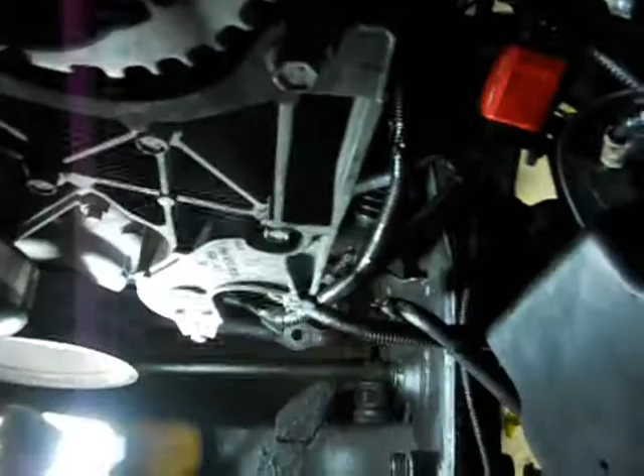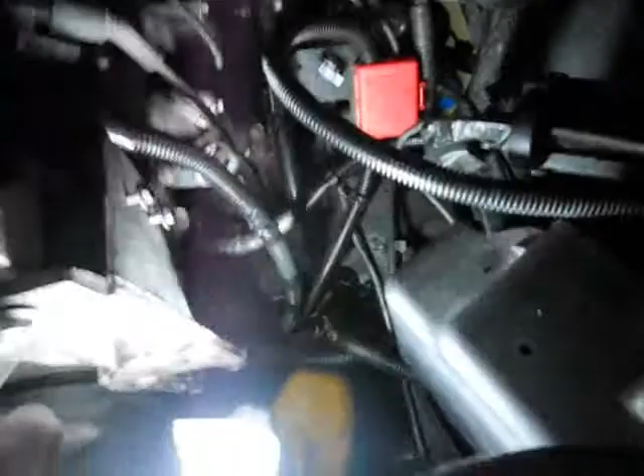Had a little bit of a problem. Got the box out, got the pump out, and the new pump's now messed up. There's a bolt, a little bracket that holds the pump on, that uses that block hole right there, going into the cast iron block, holding a bracket on the back of the pump. That bolt is different than the three bolts that hold the pump on. I accidentally put that bolt in the pump and messed up the pump.

So I got another pump, the old pump. Ouch, see what I mean? Tight places, not a good working environment. That's probably one of the reasons why I even screwed this up.

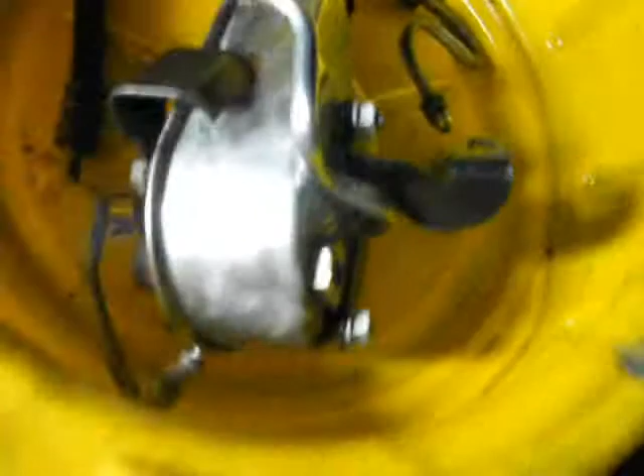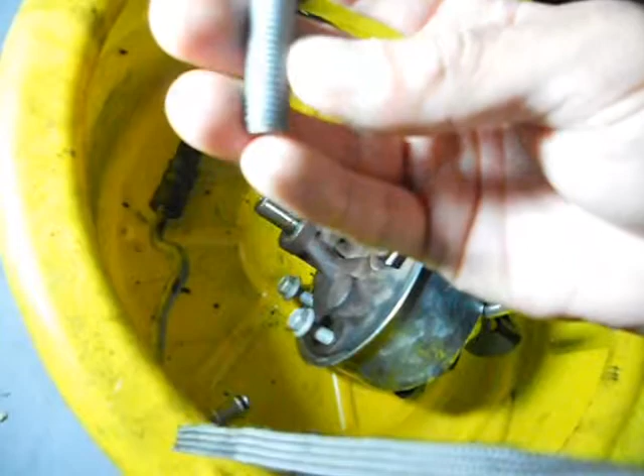The old pump fell and dented the bottom of it. No big deal. These are the pump bolts, you got three of them. That's your little bracket. The wiring harness runs down over there. Had to redo that wiring harness since the loom broke on it. This is a 15mm head, and the threads are 10mm by 1.5. So you got three of those that work fine.

Alright, you also have one of these bolts that looks pretty damn similar.

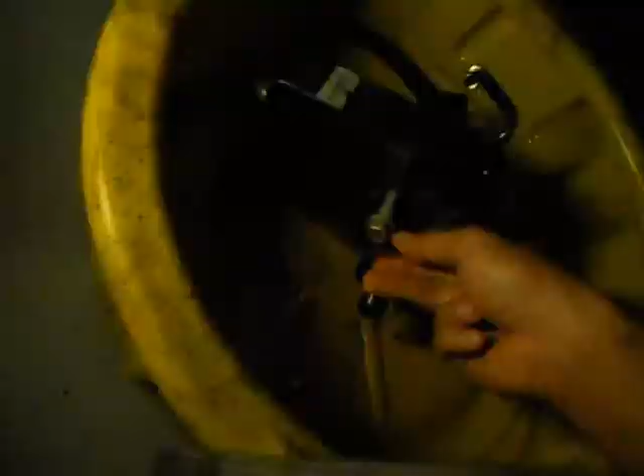Oh, there goes the light. Oh my god, man. I'm gonna have to get another battery. This is ridiculous working like that. Till this battery goes dead, back on. Anyway, what was I saying?

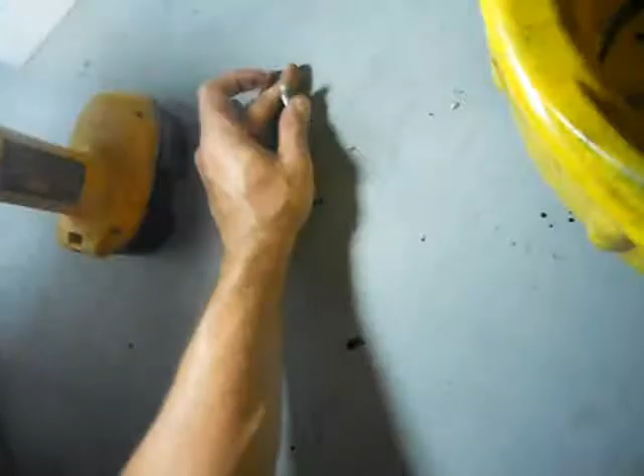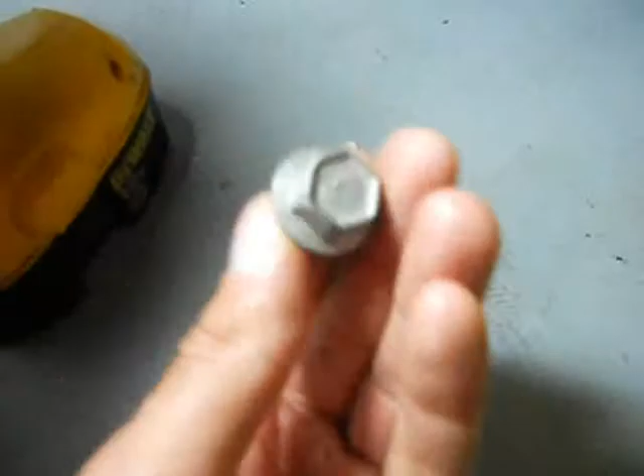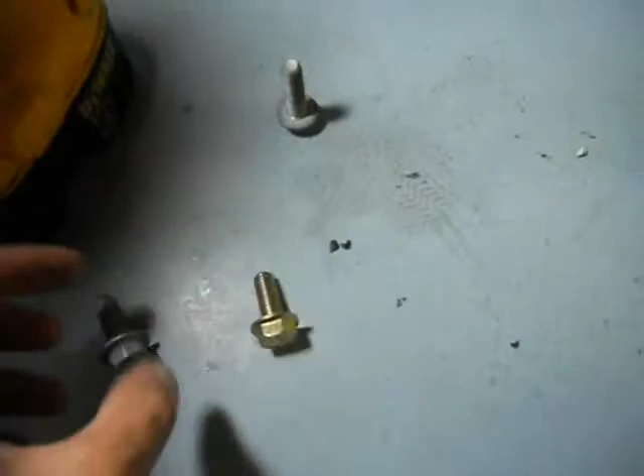This bolt looks real similar to these bolts, if I didn't already show this. This one's slightly smaller and has a domed head on it. I guess it kind of locks into the block, but I'm gonna need one of these bolts. For the time being, I got one of these from the hardware store. It looks nothing like it, I know, but it fits. It's higher grade, 10.9. It said 9.8, but it's just slightly shorter, and I'd rather go shorter than longer.

But if anyone has one of these bolts on these trucks, I'll buy it from you. If you got a Parts 5.3, 4.8, 6-liter truck engine, LS1, LS2, they all use this bolt in that bottom. I'm pretty sure they use that bolt hole and have a bolt in there, and that's where this bolt goes. Crazy looking bolt, goes right in there, whatever that hole is. So if you have one, let me know, I'll buy it from you. I'm probably gonna have to go to the dealer and pay $7 for it just to do it right, or I'll hold off and find one in the junkyard in 10 years.

Like I was saying, this loom over here, it's all the way up here. Cheap crap, they use the worst loom on these things now. It was falling apart already, so when I had the pump out, it really fell apart. So I put new stuff on. That's kind of old GM stuff down there, and this is some cheap stuff up top, but it'll work. Power steering fluid, like I said, when it gets on the frame, it totally eats it up, eats up this wax coating. It's the worst coating ever on this General Motors stuff.

Power steering fluid, transmission fluid, eats it right up. Motor oil will too, but it takes longer. So I spray bombed the hell out of it, undercoated it. It looks just awful going all the way up here, but it's pretty much sealed up. I got undercoating like everywhere.

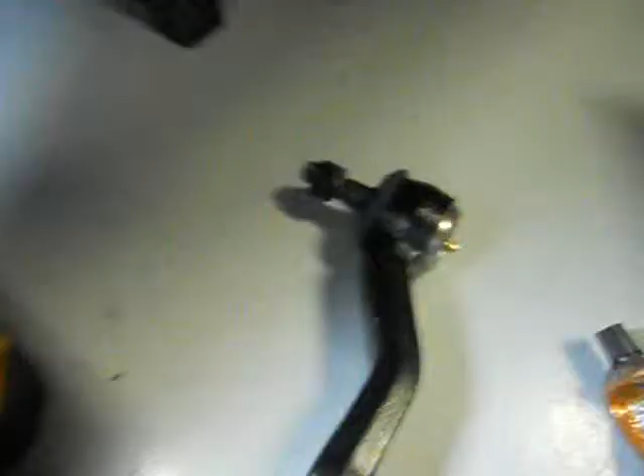New idler arm - not idler arm, pitman arm. I'm waiting on the idler arm. This thing looks so much smaller than the one that came off, so I'm not too pleased about that. AC Delco. Ripped my ball joint boot over there too, or it was ripped. RTV'd it, and actually it's holding, believe it or not. Pretty strange, it doesn't usually work.

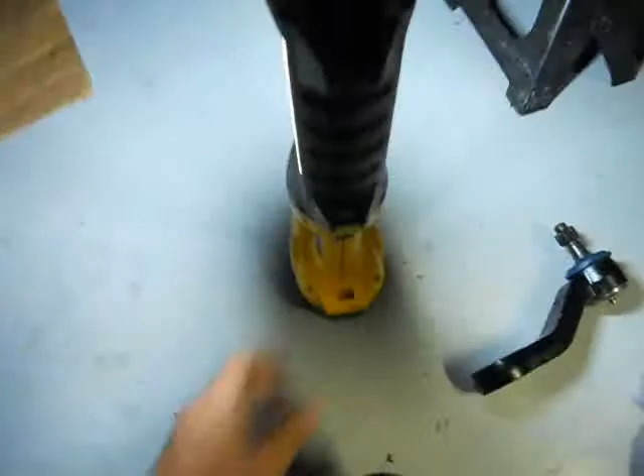I think I'm gonna use windshield urethane and put some in there because this stuff's hard as a rock. So I screwed that up, so now we're delayed some more, but we don't have a box anyway, so we can't do anything with it. That's the bracket right there.

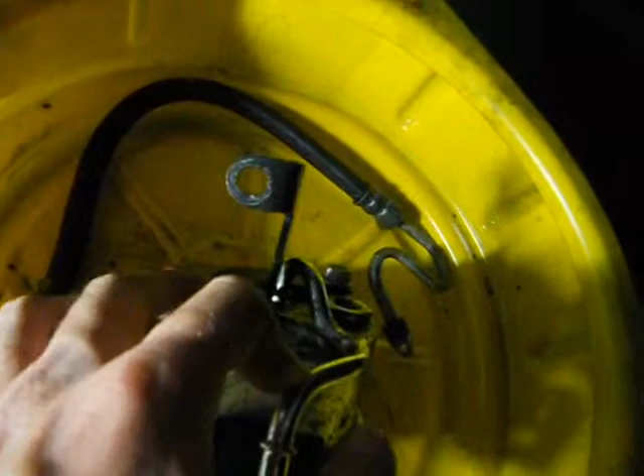When you take the pump out, you can actually leave that bracket on, and you can get these two nuts off afterwards. But in order to do that, you must disconnect the negative battery cable. You gotta disconnect the alternator, because that little wire comes off of this junction block, and unbolt this junction block - got two 10s over there. Just let it hang, and you got much more room to fish the pump out.

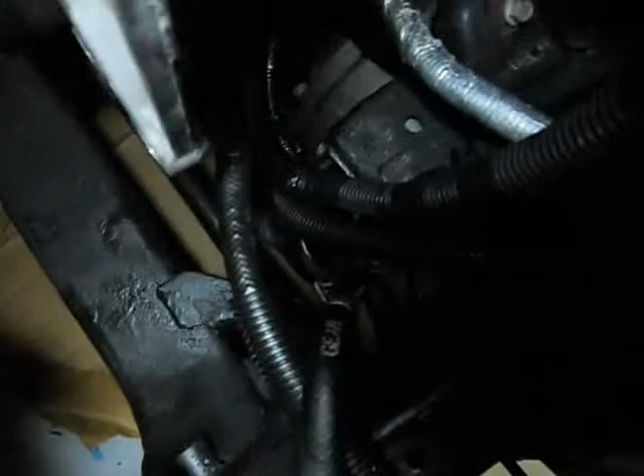It's gotta come out this way. Oh, you gotta remove your engine coolant temperature sensor connector right there too, and you can fish it out. It's pretty easy, it's just a clamped on connection right there, and your high pressure line - that's the other side, goes to the gear. It says gear return line. You got a cooler up front somewhere in there on these models. But that's all we can do.

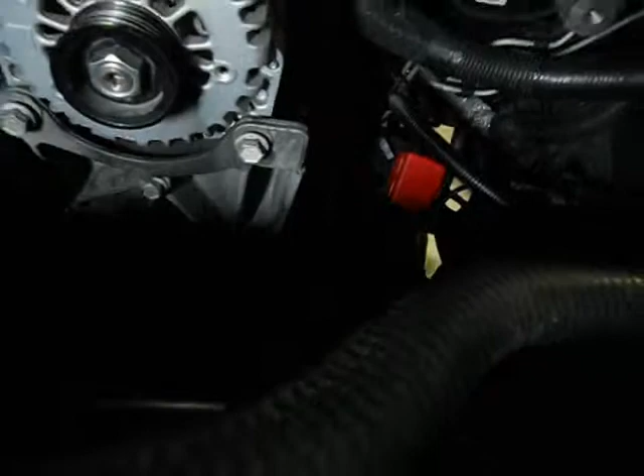Waiting on idler arm, we'll see what kind of disaster I can do with that next. And I need a bolt - if you have a bolt, let me know. That's the bolt I need.

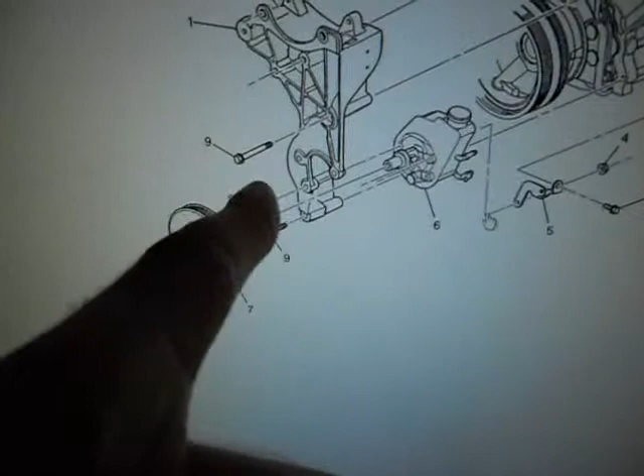Figured out the size, 10mm by 1.5, that's this bolt. That bolt. I think the bolts that thread into the heads might be different. These are M10 by 1.5 to these nuts that go in the back of the pump. So if you ever have a problem with those or lose one, that's what it is.

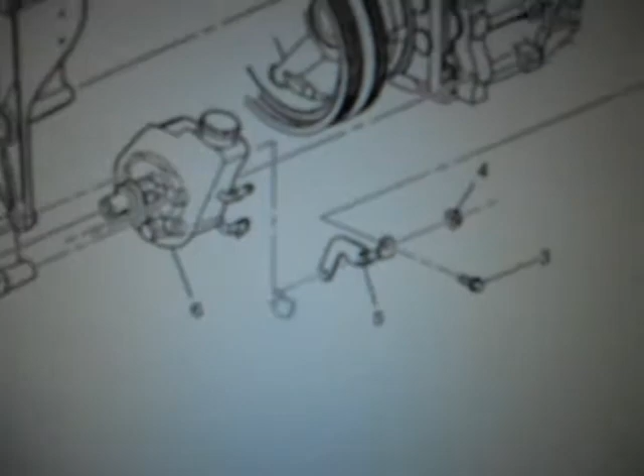So bad, we got Cookie, and we're figuring it out as we go. This damn, what is it, GM Parts Giant I think I'm on. They don't show you the part number, so I was gonna try to get the part number and try it another place for cheaper. Give it to the dealer, but they're being asses, so I'll go next door to the dealer and ask them what the deal is. Maybe they have one on the shelf, maybe they don't.

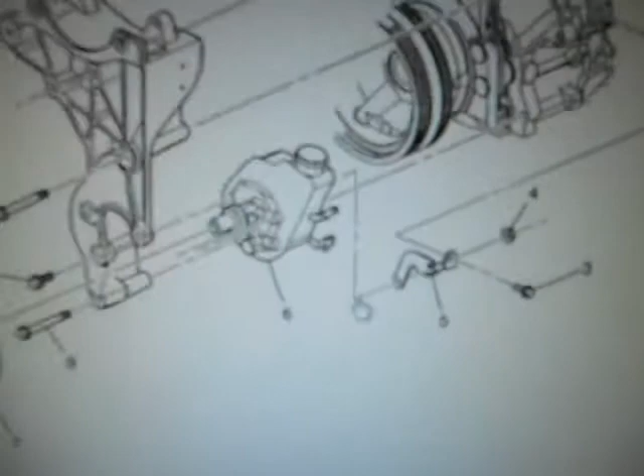The Camaro too has the same bolt. Goes right over there in the back of the motor, and the alternator bracket hooks into it. So like every LS1 engine, their hole is utilized on the driver's side, believe it or not. So we learn stuff from our screw ups too, which is kind of cool. Learn about the LS1 style engine a little bit more.

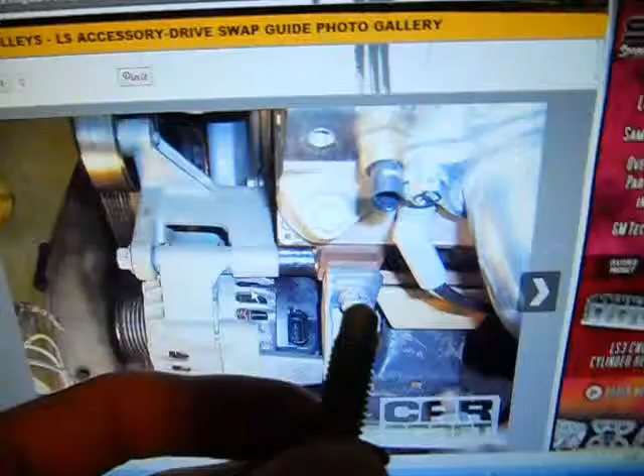Oh, Camaro, same bolt. Look, I'll thread it in. See me screwing it in? Alright, got it in. Alright, let's go.